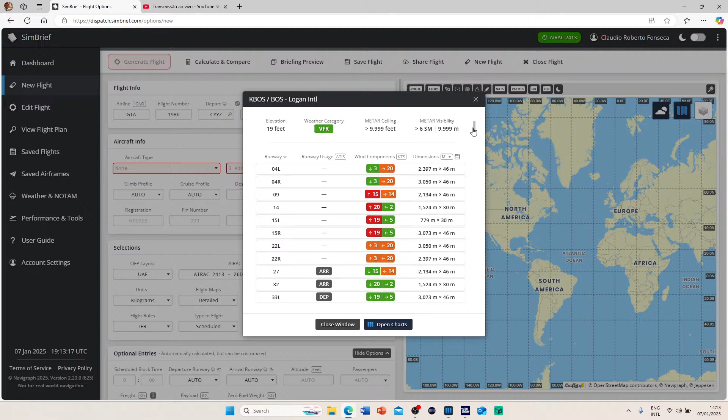The weather looks okay, and the forecast is showing up to 34 knots, and from tomorrow at 3 Zulu it's going to go down to 25. So yeah, it's going to be gusty winds there in Boston all the way, but as you can see, visibility does not change, so it's not a big deal for us to go to Boston.

Real World ATIS is here for Boston, and they are working on approaches being conducted to converging runways. Yes, departure runway 33, arriving 27 and 32. Yeah, that's what they have here, 27 and 32. And NOTAMs, we don't care about it.

So that's it. Now I'm going to select the 777, the freighter. I'm going to use the altimeter configuration. Registration - let me just check what is our registration. On the sim here is November 703 Golf Tango, so I'm going to use this one. November 703 Golf Tango. The FIN number we have there is 703.

703. And SELCAL - let me see if we have a SELCAL on our panel, it's Quebec Sierra Echo Juliet. So Quebec Sierra Echo Juliet.

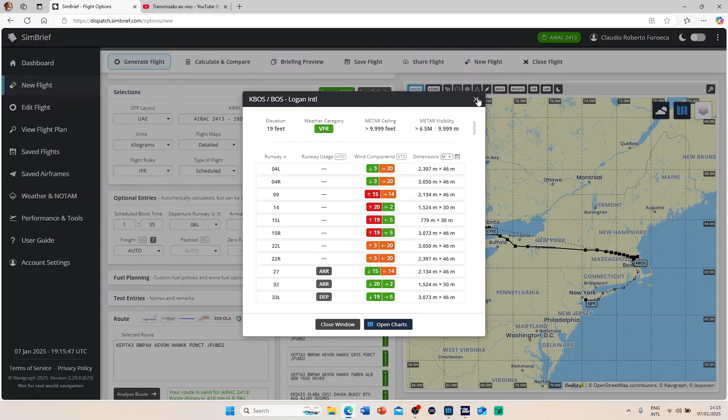And runway 27 for arrival for now. Altitude is auto. Passengers, there are no passengers, freighter for auto. Fuel planning, I want to have 10% contingency reserve of 30 minutes, that's all fine. And I don't want to arrive with less than 6 tons on arrival, and we can generate our flight.

So as we are generating our flight, we have here all the information, and I can even pre-file this on a network, which is VATSIM. Pre-file, there we go. GTA 1986, it's all fine, and I'm going to file flight plan. Flight plan filed. So there we go.

What we have here important for us, I'm going to check inside the airplane, but basically 1 hour flight, 39,000 feet, cost index 35, and the fuel we are going to need 16309.

And what is the en route? En route burn 7,300 kilos. So basically 16 minus 7, we are going to land there with something around 8.9 tons, 8 tons more or less. So we are all fine, and this is good for us today.

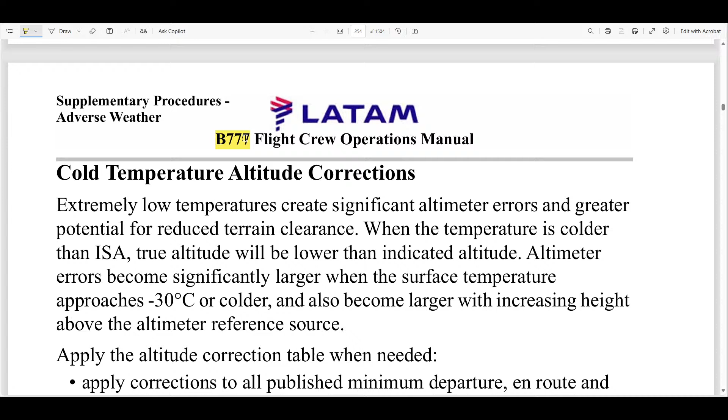Yeah, while we are flying, so we have this manual, the 777 by Latam, but it's the same for all companies around the world. So we have cold temperature altitude corrections.

It says that extremely low temperatures create significant altimeter errors and greater potential for reduced terrain clearance. When temperature is colder than ISA, true altitude will be lower than indicated altitude, which means when the temperature is low, you are lower than your altimeter is indicating.

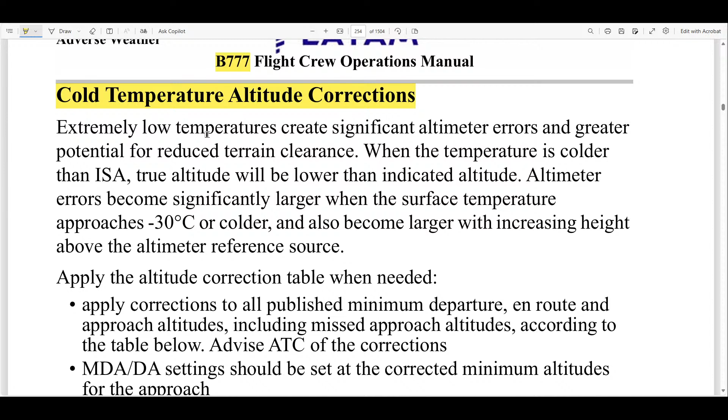Altimeter errors become significantly larger when the surface temperature approaches minus 30 degrees or colder, and also become larger with increasing height above the altimeter reference source. So if you are close to sea level, the error is lower than if you are high.

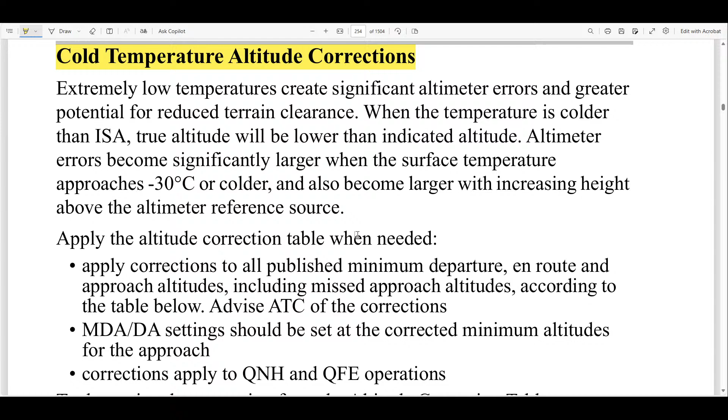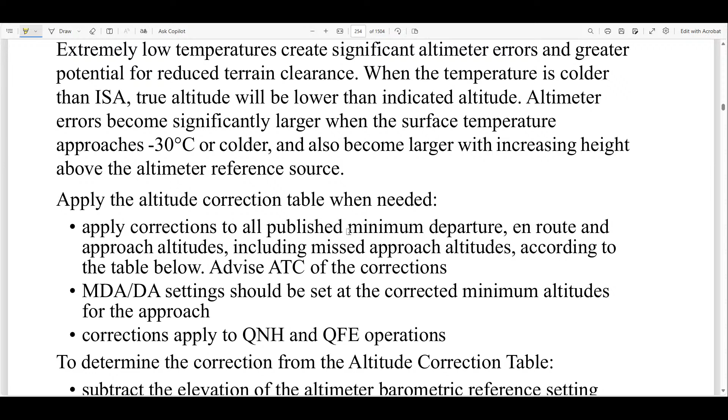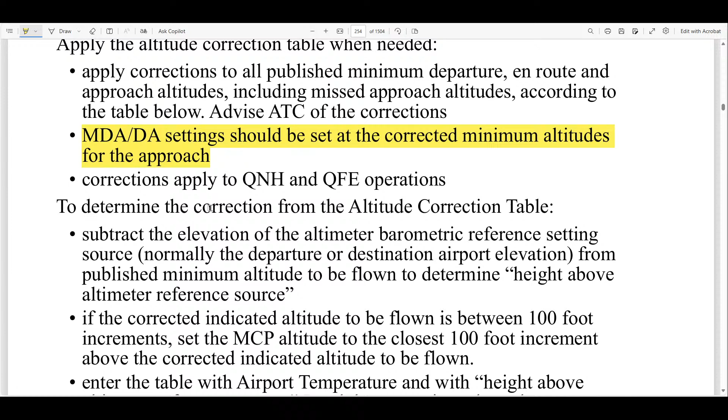But anyway, we apply the altitude correction table when needed. So apply corrections to all published minimum departure, en route and approach altitudes, including missed approach altitudes, according to the table below. Advise ATC of the corrections. So MDA and DA settings should be set at the corrected minimum altitudes for the approach. That's what we did, we corrected the minimum altitude for the approach. Corrections apply to QNH and QFE operations.

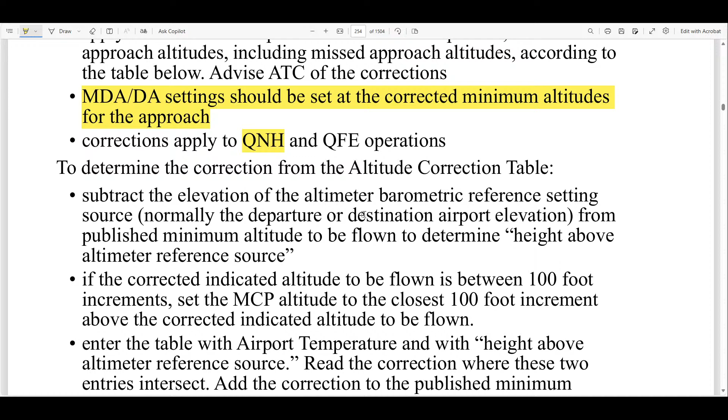To determine the correction from the altitude correction table, subtract the elevation of the altimeter barometric reference setting source—normally departure or destination airport elevation—from the published minimum altitude to be flown, to determine the height above the altimeter reference source.

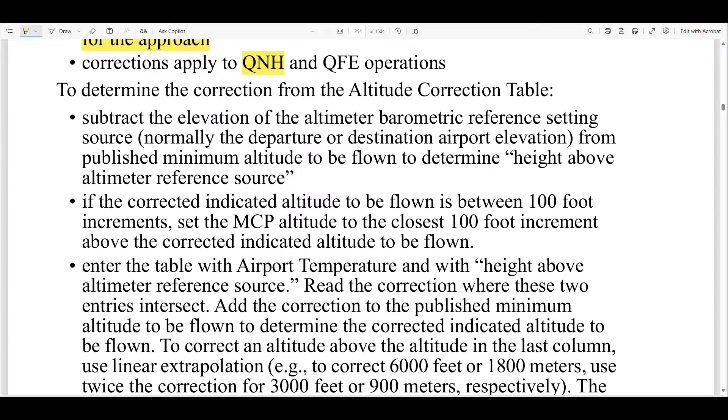Thank God, Jeppesen, the chart already give us the height in parentheses, so we do not have to do this—it's already on the chart.

If the corrected indicated altitude to be flown is between 100 foot increments, we set the MCP altitude to the closest 100 foot increment above the corrected indicated altitude to be flown, because we can only set the MCP in 100 foot increments, so we always set it above.

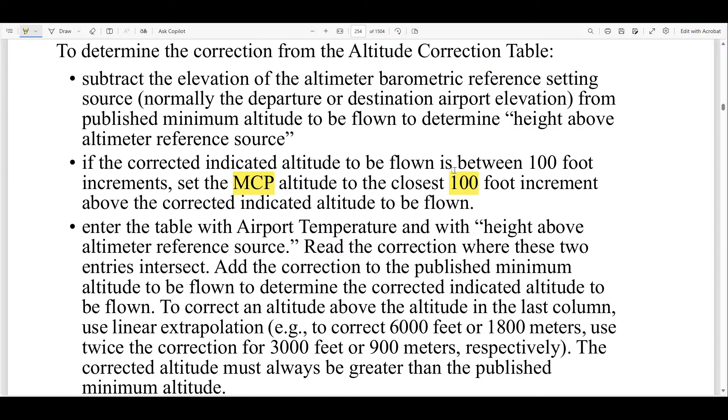Enter the table with airport temperature and with height above the altimeter reference source. Read the correction where these two entries intersect, then add the correction to the published minimum altitude to be flown to determine the corrected indicated altitude to be flown.

To correct an altitude above the altitude in the last column, use linear extrapolation. For example, if you want to correct 6,000 feet, we use twice the correction for 3,000 feet. So the corrected altitude must always be greater than the published minimum altitude, and we do not correct altimeter barometric reference settings.

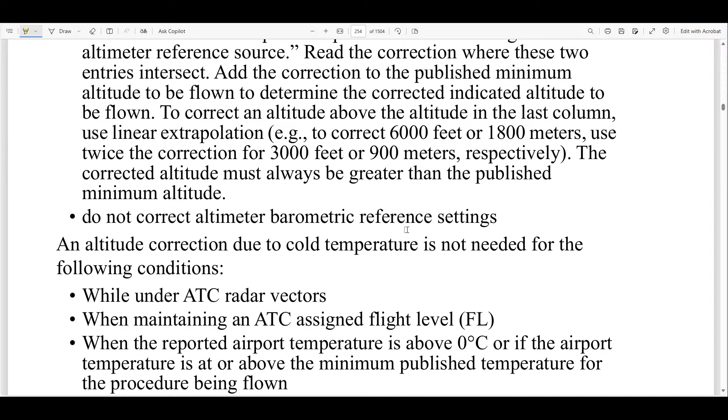An altitude correction due to cold temperature is not needed under the following conditions: if we have ATC radar vectors, when ATC tells you an altitude, when the reported airport temperature is above 0 degrees Celsius, or if it's at or above the minimum published temperature for the procedure being flown.

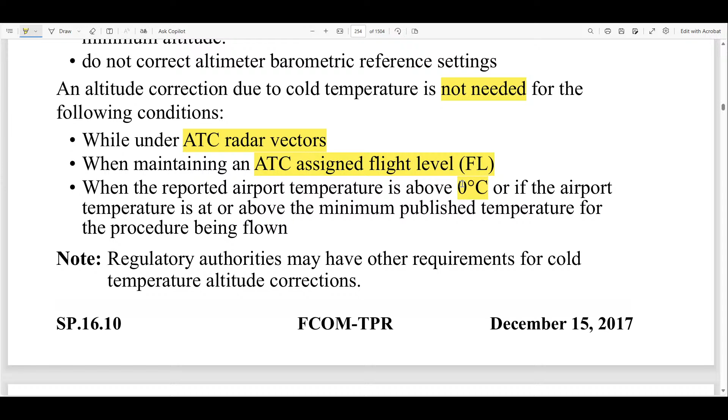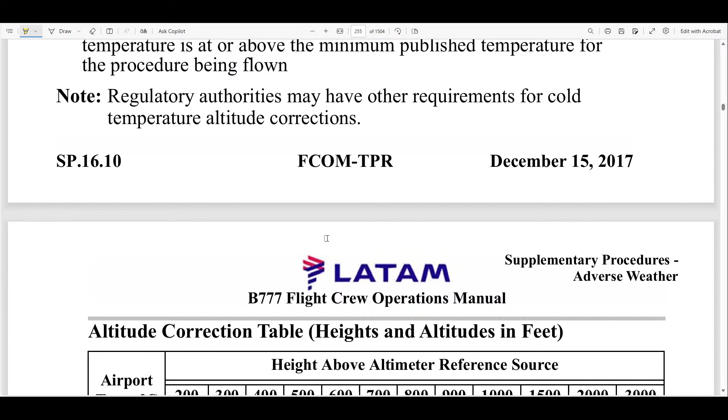Okay, so right now today we have the temperature below 0. That's why we need to correct altitudes from the procedure when we are not on ATC radar vectors or any level assigned by ATC. And in this case today, the temperature is between 0 and -10.

Temperature in Boston—one more time, let me check this—yeah, the temperature was -3, okay? So that's between 0 and -10. So we want to be conservative, so we are going to use -10, okay?

So now I'm going to write it here. Our...

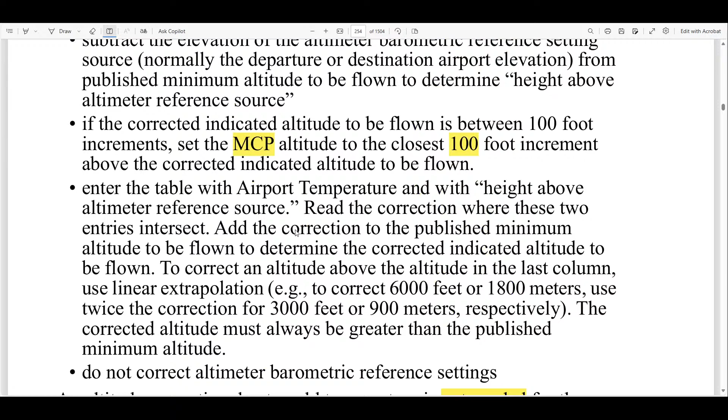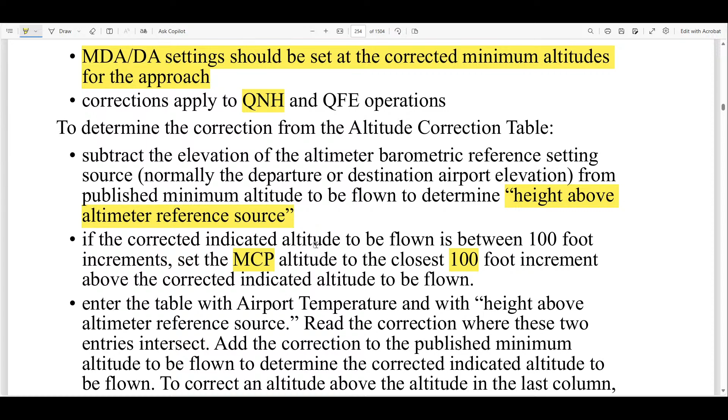So 460 is the minimums, but the height is actually 443. Okay, so this is our height. Oh, it was here, so I can delete one of these. So our height above the altimeter reference source is 443.

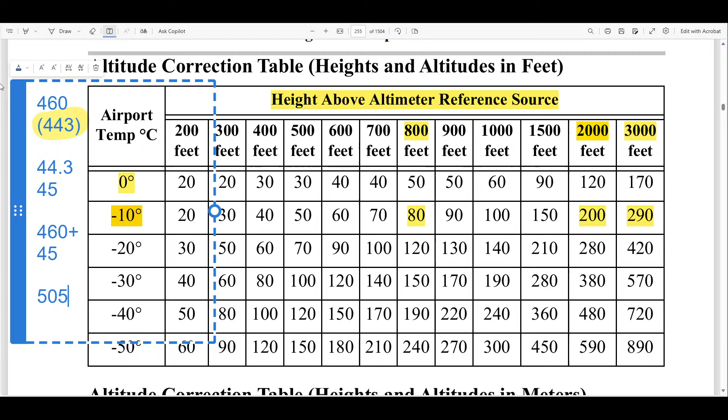Then if you take 10% of this—10% of 443 is 44.3, which we can call 45 feet. And if you add 460 feet plus the 45 feet we found as the correction for today, our minimums for today is 505, and it is written here.

We have to—the DA setting in this case should be set at the corrected minimum altitude for the approach.

Okay, so that's why today—even though we have minimums on this chart saying 460—we are adding 10% because of the temperature, which brings us to 505 as minimums for our approach today.

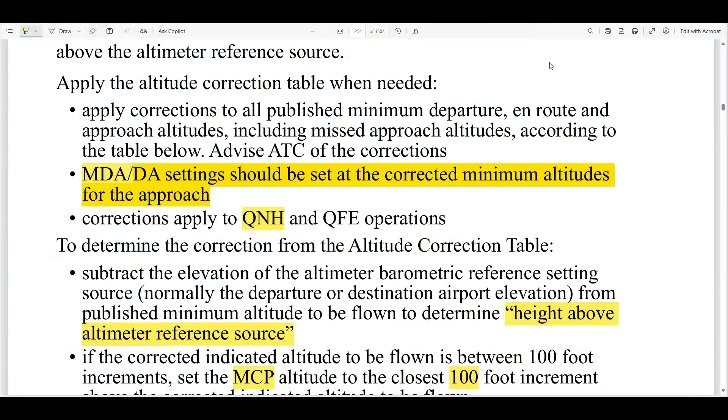Okay, so anytime the temperature reaches 0 or below, you need to do this correction, and you can take a screenshot of this table that I'm going to show you one more time. Let me erase this—you can take a screenshot of this table. So this is the table you are going to need to correct your altitudes, okay? Remember, up to -10 is a 10% correction.

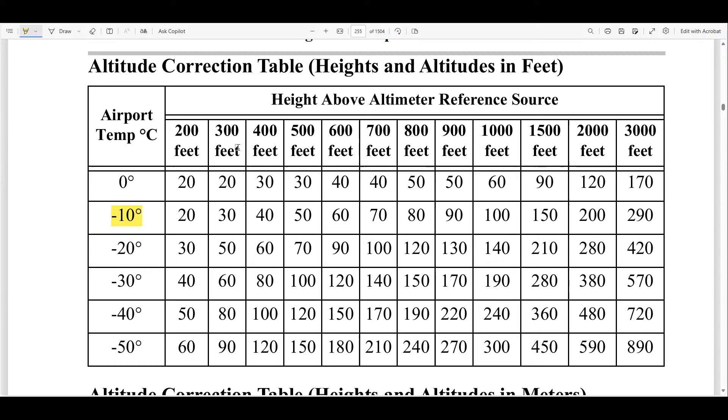On the Jeppesen charts you already have the height for your minimums, so it's very easy for you to make these calculations, okay?

Boston Center, Southwest 1787, descending out of 34.

So I hope you guys are following it and were able to understand why we didn't use the minimums of 460 from the chart, and we are going to use 505.

Usually people say that if there are no questions, everybody understood, right?

Metro 9939, so just to finish this: the highest MSA is 2,500 feet, which is basically 2,500 feet above airport elevation, since the airport elevation is only 19 feet.

So if we add 10%, that makes 250 feet, so 2,750 feet is actually our minimum safe altitude corrected for this temperature.

So anytime we have any altitude on the procedure below 2,750, we need to correct these altitudes to make sure we are not going to get closer to or hit the terrain on this approach. It's the same for departure, and the same for any arrival.

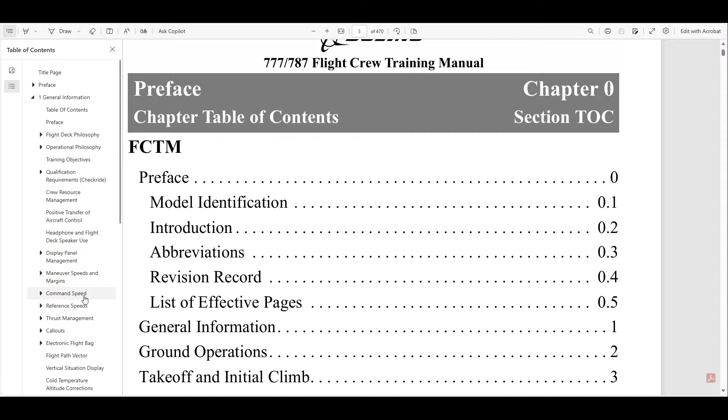This was also by LATAM, but it's the same for every operator. So, command speed, that's something we are going to use today. 2690, cross Abaddon. That's something important here when we talk about landing, okay.

And it says, which is the case today, if a manual landing is planned with the auto throttle connected, which is also the case today, in gusty or high wind conditions, consider positioning the command speed to VREF plus 10 knots.

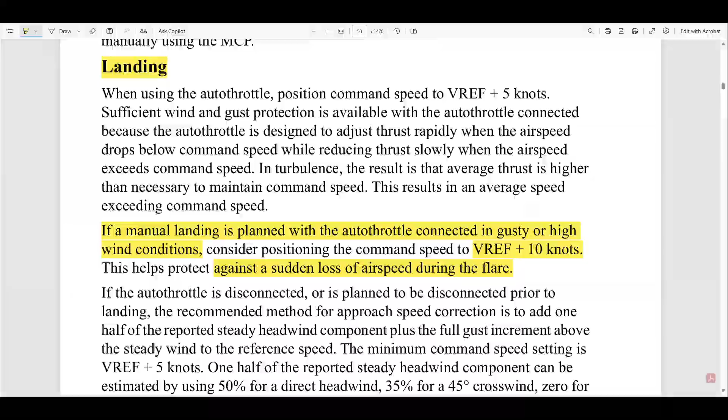That's why we are using VREF plus 10 knots today. This helps protect against a sudden loss of airspeed during flare, okay, and that is the reason for our VREF plus 10 today.

I think we just started the descent. Yep, idle, and we are leaving flight level 390.

Another thing that I want to show is, let me see if I can find it. Give me one minute, I will try to find and show you. Roger.

Oh, it's going to be, let me find this in the manual. So, non-normal. Airplane performance on wind shear, that's not the case.

We can go to... I'm going to show you something else now.

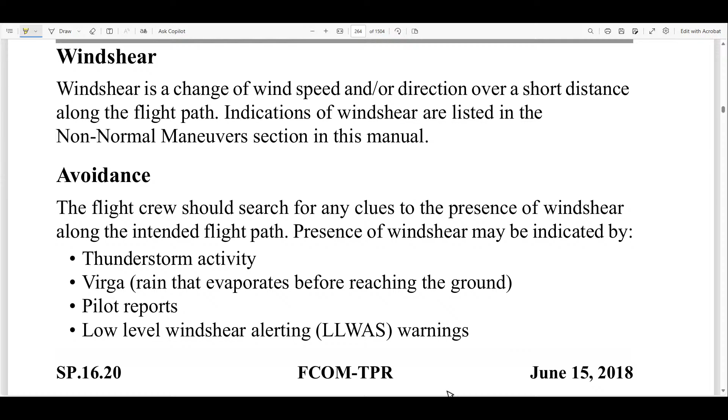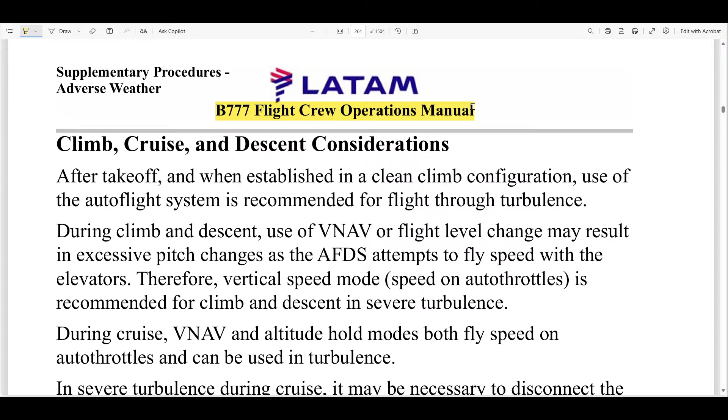So right now we are on the LATAM, but right now the Boeing 777 FCOM, flight crew operations manual, and then it says wind shear.

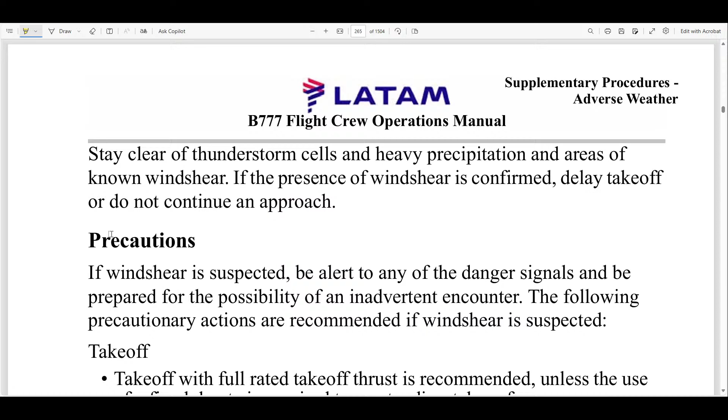So in case we have wind shear today, there are some precautions that we can take. And for landing, it's showing further on.

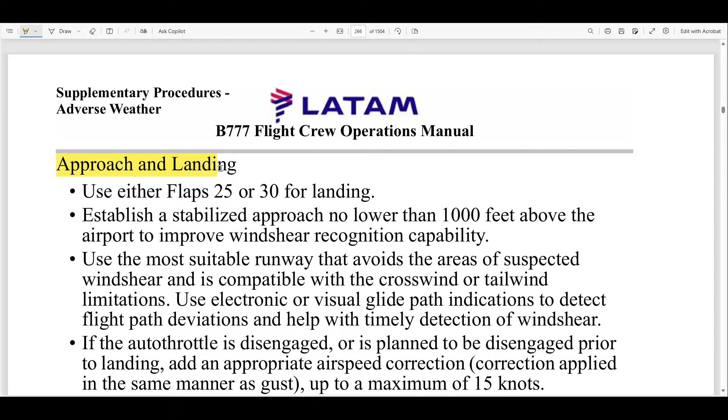So for approach and landing, we can use either flaps 25 or 30, it doesn't make much difference by Boeing.

I prefer flaps 25. I have a big margin to the flap placard speed, so if the speed increases or if we need to go around, we don't have to worry much about our speed, compared to flaps 30.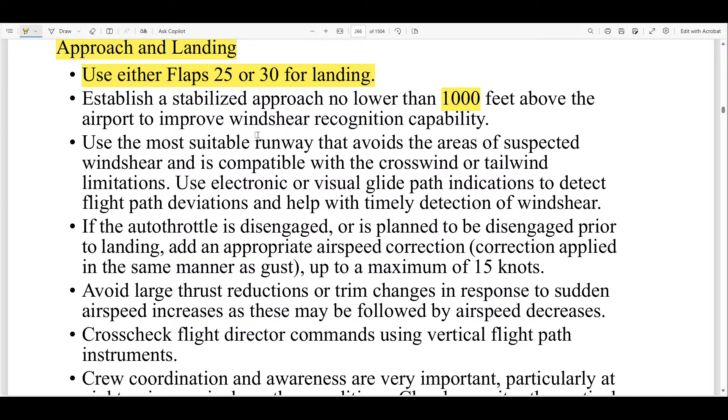Stabilized approach no lower than 1,000 feet, that's what we are going to do anyway. Use the most suitable runway that avoids areas of suspected wind shear and is compatible with the crosswind or tailwind limitations. We use the electronic, which is the glide slope, and the visual glide path indications to detect flight path deviations.

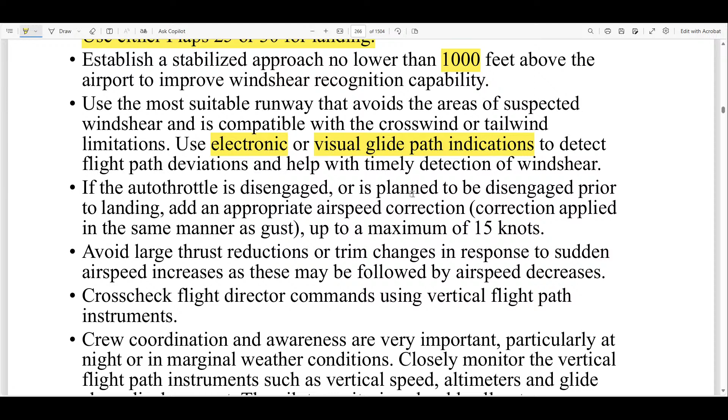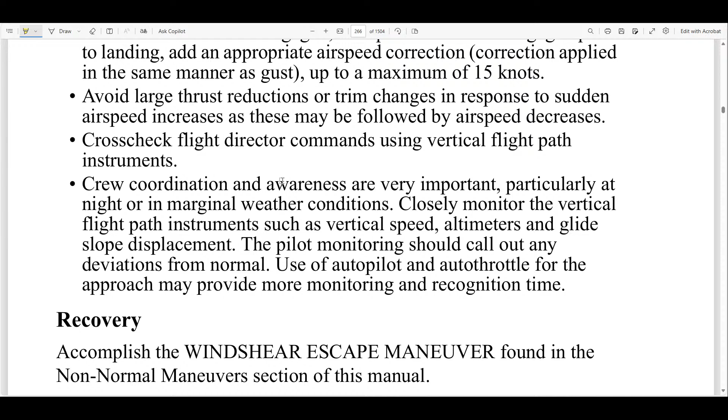And if auto throttle is disengaged, which is not the case, avoid large thrust reduction or trim changes. Cross-check flight director commands, and crew coordination and awareness is very important. If something goes wrong, then we do have the wind shear escape maneuver to perform.

Taxi, and which runway would you like? I think it was 24 or 3. Let's now focus on our descent.

Approval call for taxi, and we have 6 filed if we could use that, American 1446. Yeah, we can do that, no problem.

So I hope you guys today understand why we are using VREF plus 10 instead of the standard VREF plus 5, and also why we are using 10% altitude correction on the approach, including our minimum DA of 505 today instead of the standard 460 in Boston.